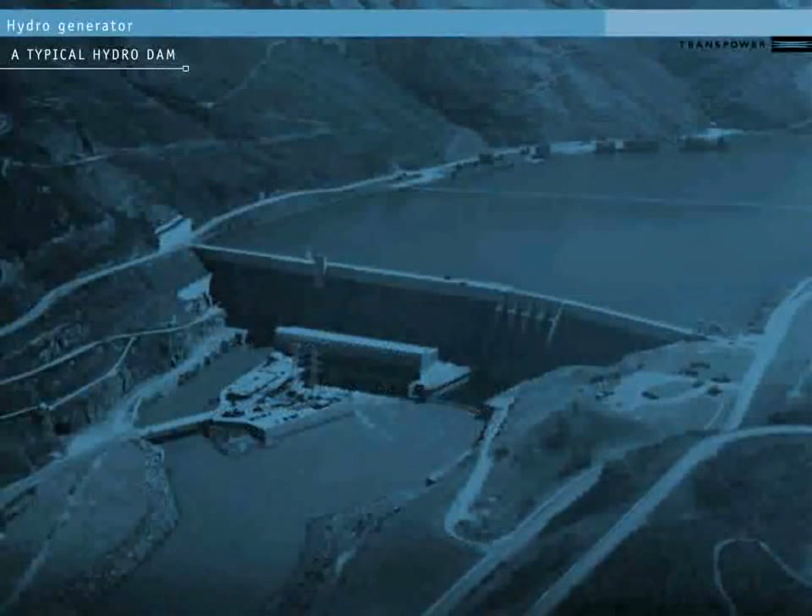In this animation, we'll look at how a hydro generator works. This is a typical New Zealand hydro station. You can see that the station has a dam, which creates a drop from one water level down to another.

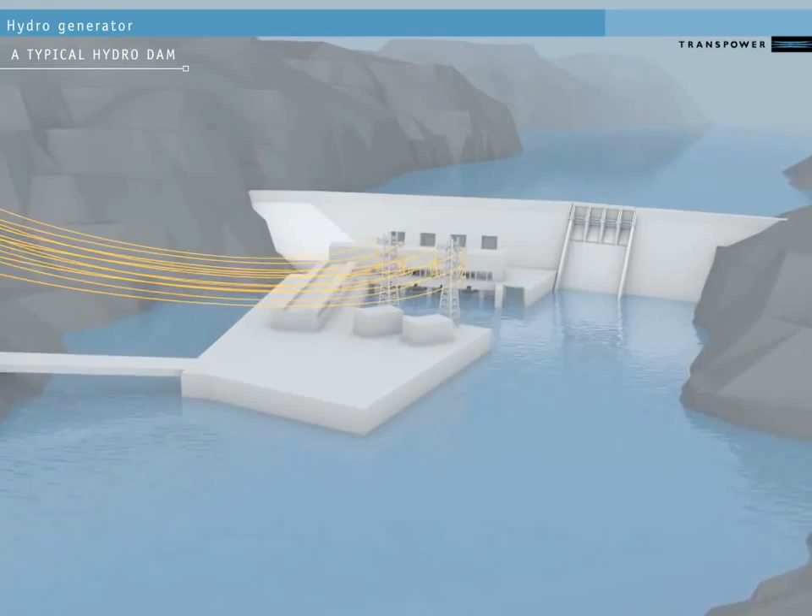From outside the station, we can't see the generators. If we approach though, we can see the power lines or conductors that carry the electricity from the station to the national grid. Each power conductor connects to a turbine-powered generator inside the dam itself.

Let's go inside the dam now and look at one hydro generator to see how the power is produced. The water from above the dam flows down through pipes called penstocks. Each penstock has its own headgate at the top to stop water flow for maintenance or during an emergency.

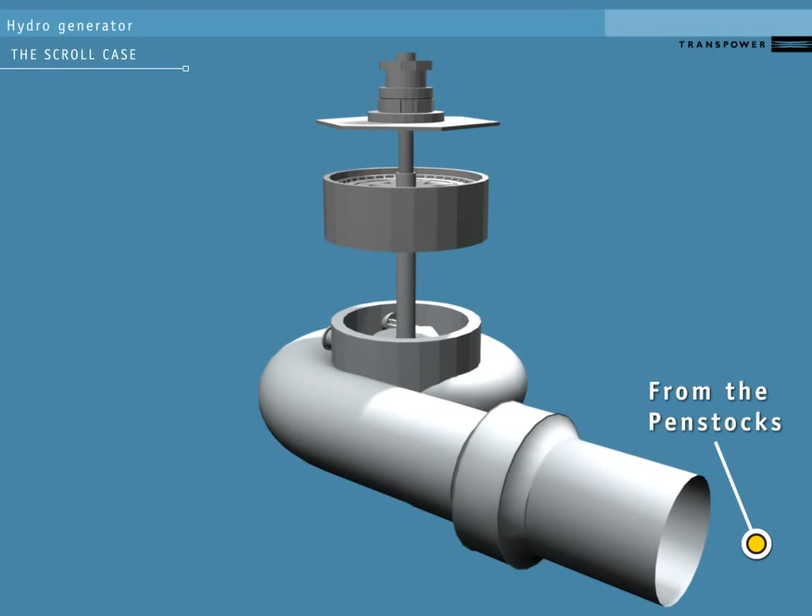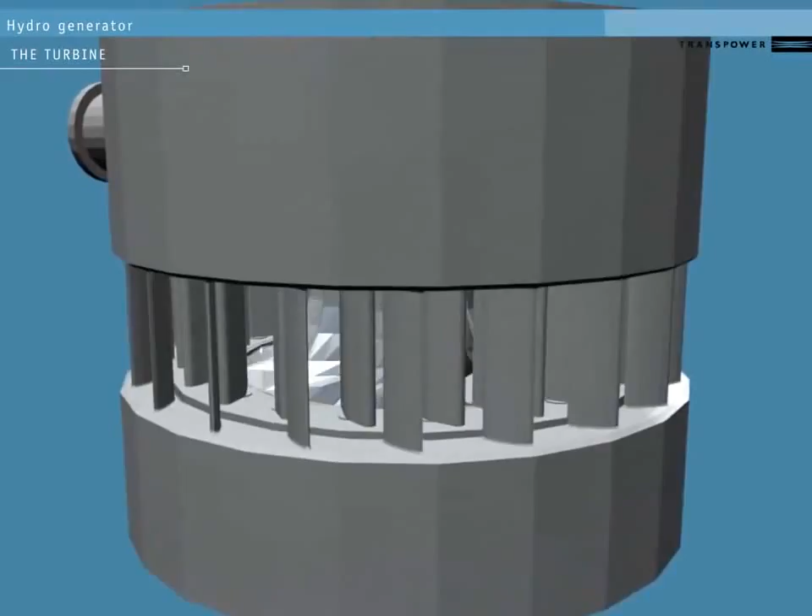At the end of the penstock is the scroll case. This curls around the turbine like a snail shell. It's designed to create a consistent pressure of water entering the turbine from all sides. Inside the scroll case is a set of vanes called the wicket gates. These control how water flows into the turbine.

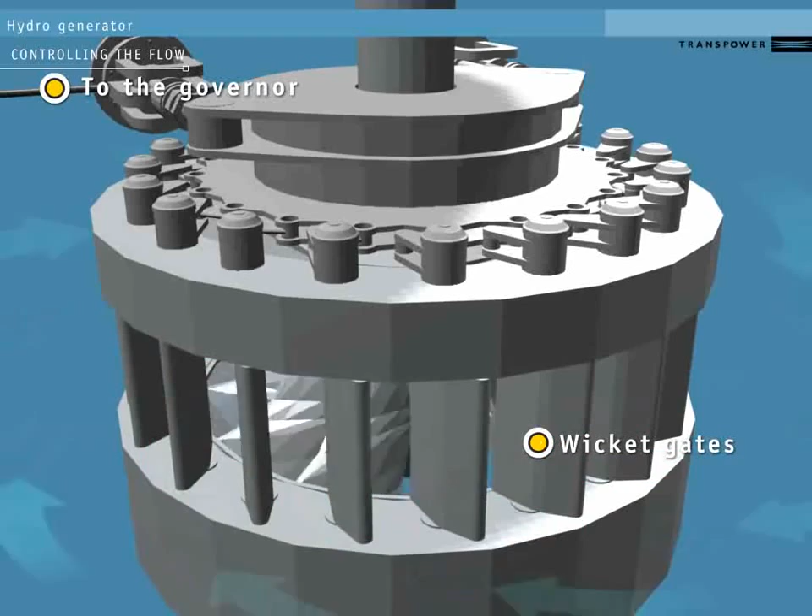The wicket gates are controlled by an external governor system. This opens and closes them in response to conditions on the national grid. A high load on the system slows the turbine. The governor system reacts by opening the gates further to speed it back up. Conversely, it will narrow the wicket gates in response to low load on the system.

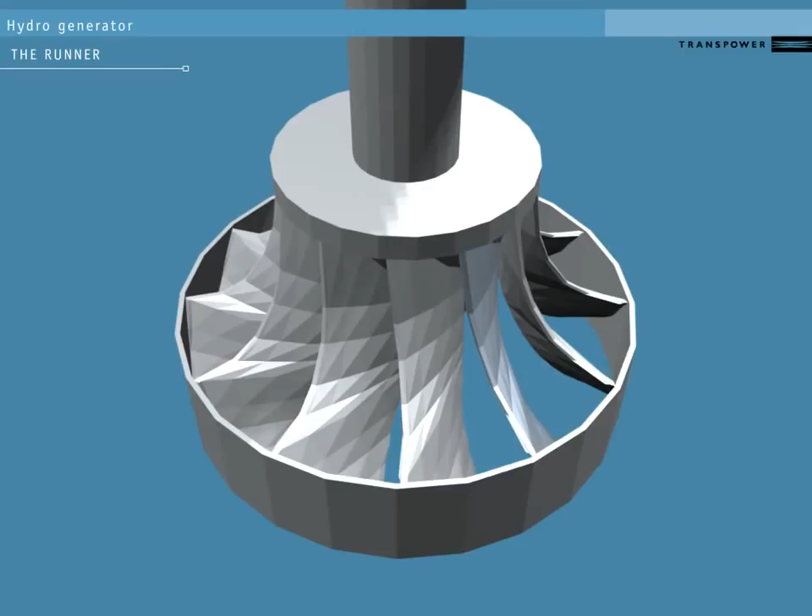Beyond the wicket gates, we can see the turbine blades. The blades are shaped to extract the most possible spin from the moving water. The turbine blades and the shaft connecting them to the generator are called the runner. We will expand this into its parts so we can see them clearly.

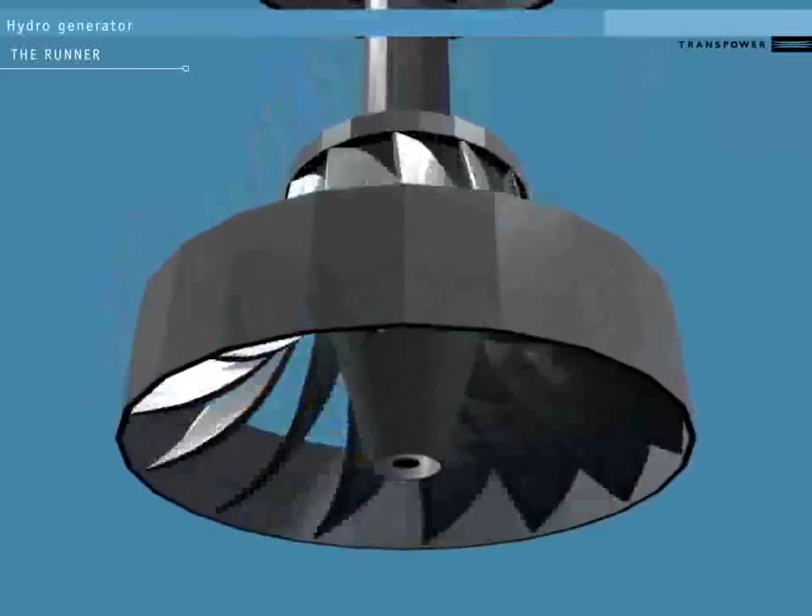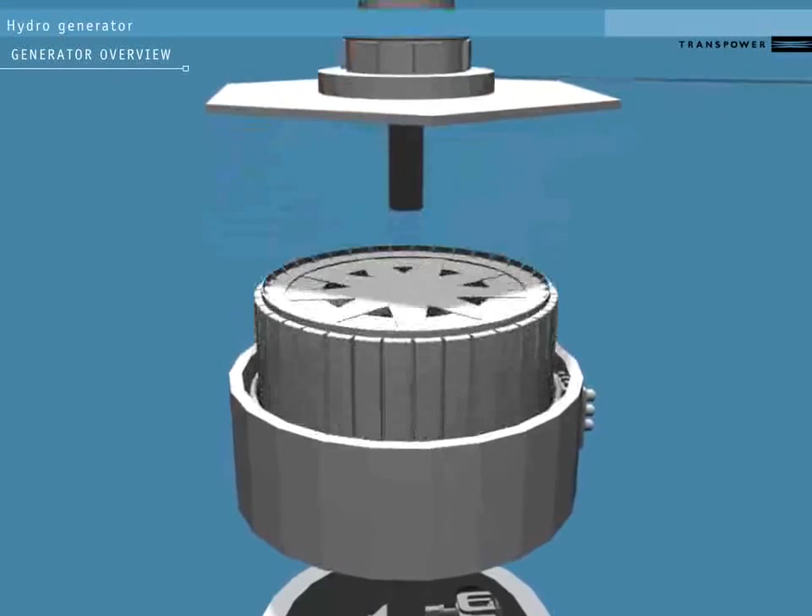At the top is the exciter, which gets a small DC power supply from a cable attached to an external controller called the Automatic Voltage Regulator, or the AVR. Below the exciter is the generator. The inside is a rotor, turned by the runner. The outside stationary part is the stator. This is made up of a set of 3 coils of copper wire called windings.

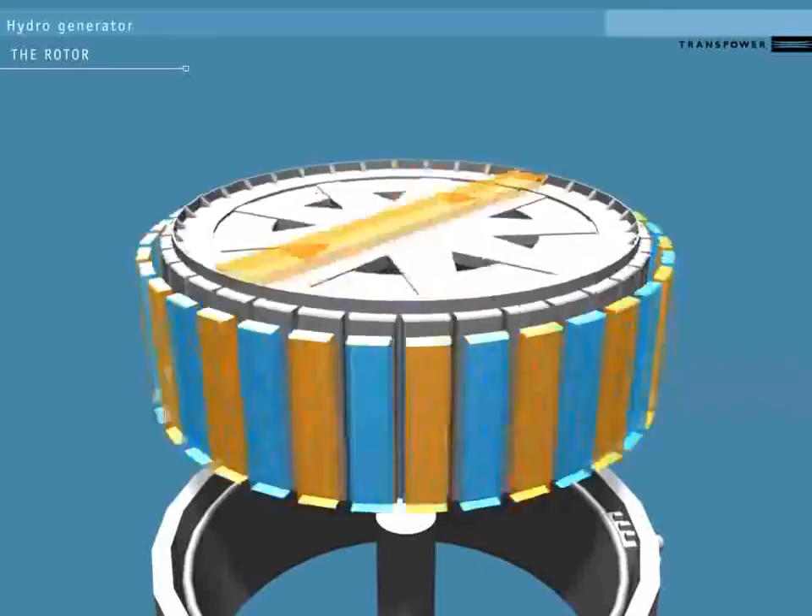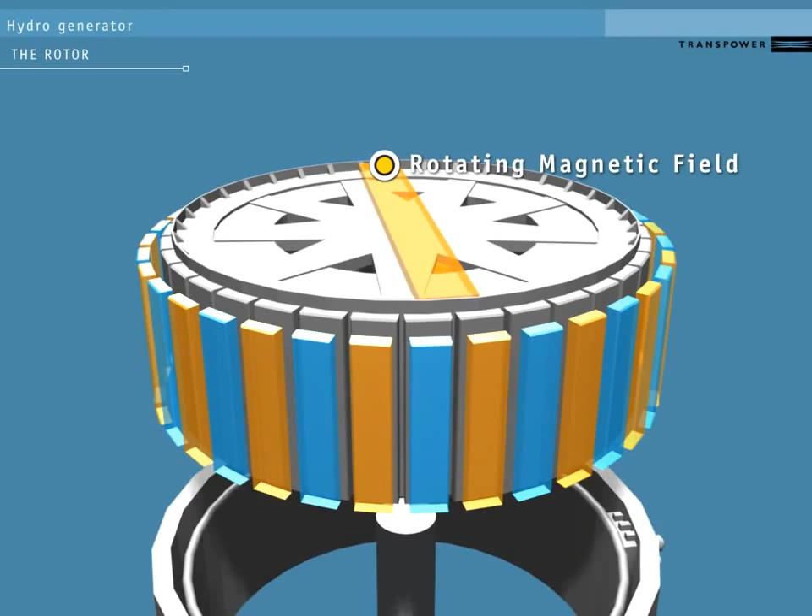On the rotor are a number of electromagnets, powered by the DC current from the exciter. If these are switched off, the turbine will be able to spin without generating any electricity. The magnet's poles on the outside of the rotor create a separate rotating magnetic field for each magnet. The magnets are lined up so that adjacent poles always have opposite fields to each other, north-south, north-south.

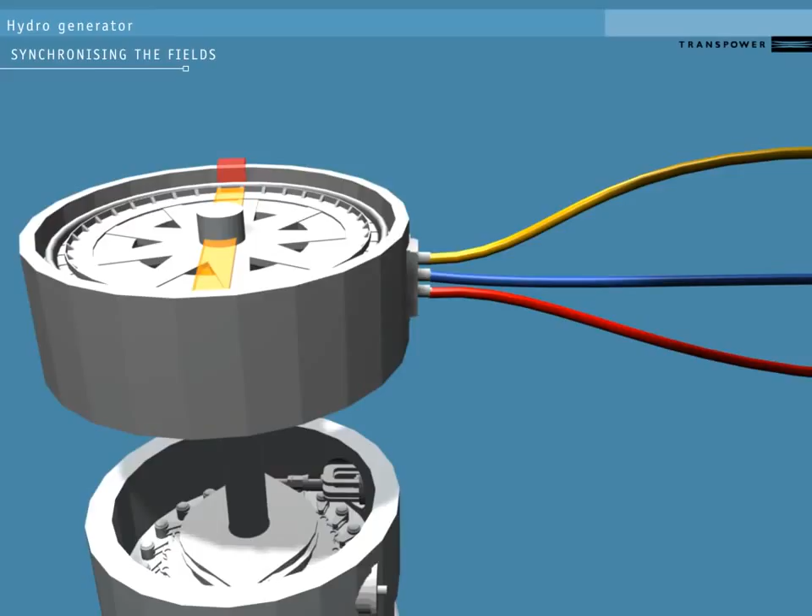Because the stator is connected to the grid, it's important that the pulses are in time with the grid frequency. When the pulses are in time with the grid frequency, we say that the generator is synchronized. System conditions can push the stator's magnetic fields out of sync with the rotor. The difference between the movement of the stator's magnetic field and the rotor's is the torque angle. The rotor has many electromagnets on it, producing a consistent flow of power.